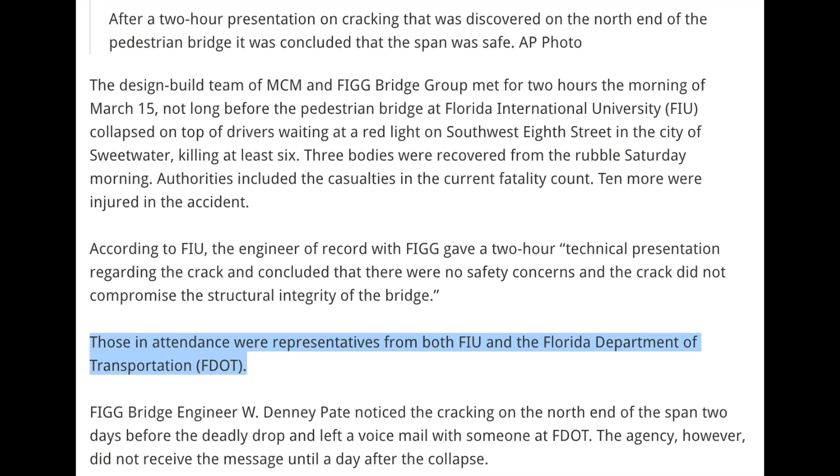Hey Tom, this is Denney Pate with FIGG Bridge Engineers. I was calling to share with you some information about the FIU pedestrian bridge and some cracking that's been observed on the north end of the span, the pylon end of that span we moved this weekend.

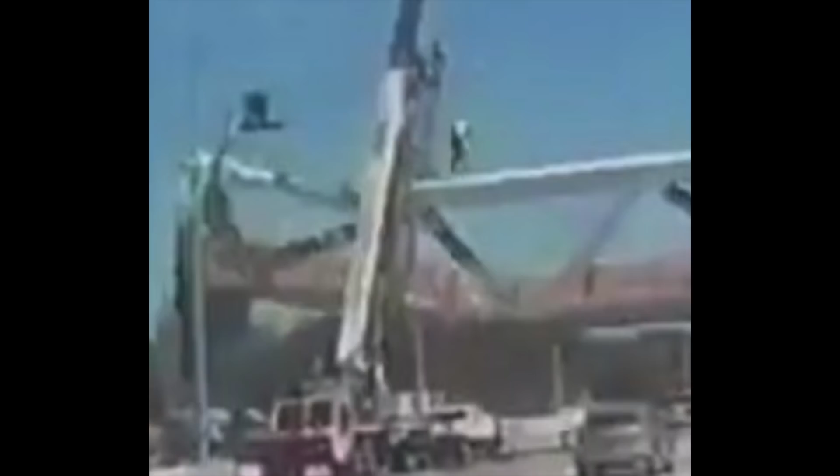So we've taken a look at it, and obviously some repairs or whatever will have to be done, but from a safety perspective, we don't see that there's any issue there, so we're not concerned about it from that perspective, although obviously the cracking is not good and something's going to have to be done to repair that. But at any rate, I wanted to chat with you about that because I would suspect at some point that's going to get to your desk. So any rate, call me back when you can. Thank you. Bye.

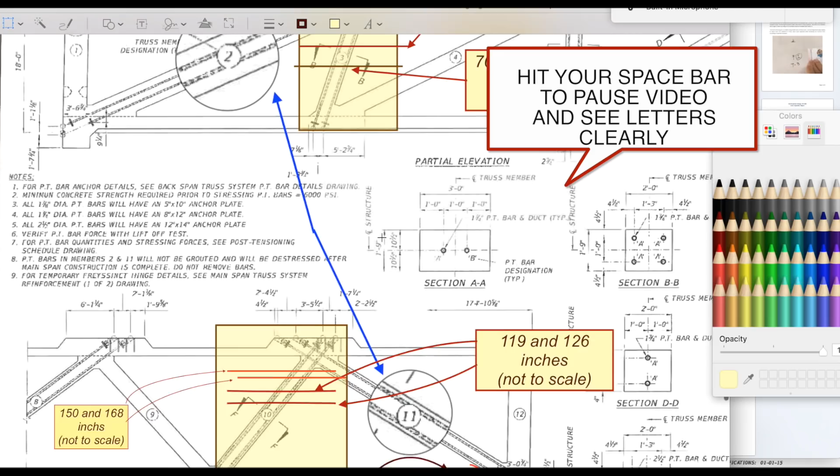It's going to be an update to a previous video I had where I show the cracks in the members. I put the cracks in those members in the wrong location. I put them over here, and I believe I put them in number 11. I should have had them in number 3 and number 10. Now let's go over that again so I can give you a correction and update.

As we see, this is the report that no longer exists publicly. It's been removed by FIU. And the report shows that post-tension bars number 2 and 11 stressed, okay. So let me just read off, sorry about that guys. A visual inspection of the main span truss members 2 and 11, so they were talking about 2 and 11, were stressed. Cracks were found at moments of the inspection. These have been identified per truss members and consecutive numbers within the member.

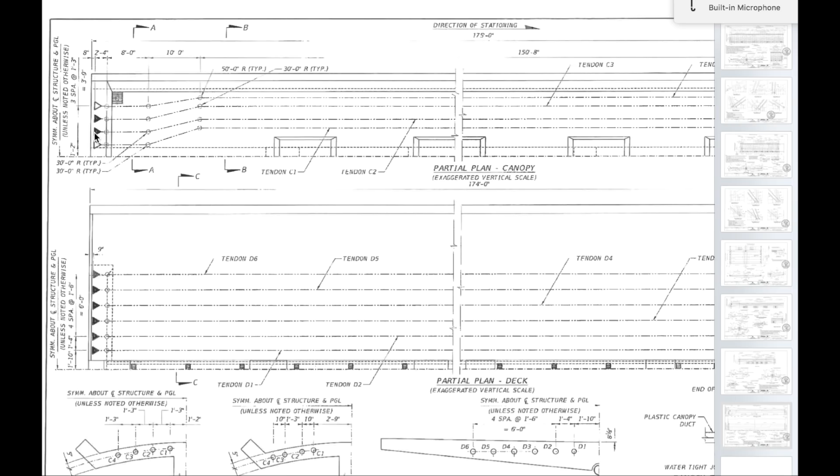But as you know, we saw the post-tension tubes; apparently C1 is now underneath the node, underneath the blister bar. That would make you also think that, heck, all of them are now straight, in line, and no longer have this profile. So C2 is pretty close. If we follow C2's path, I'm going to jump in part of this video again. This implies C2 is very structural because C2 is going to be the strong back for this bridge. C2 is the first one you see there. There's 2 of them. The other one is C3.

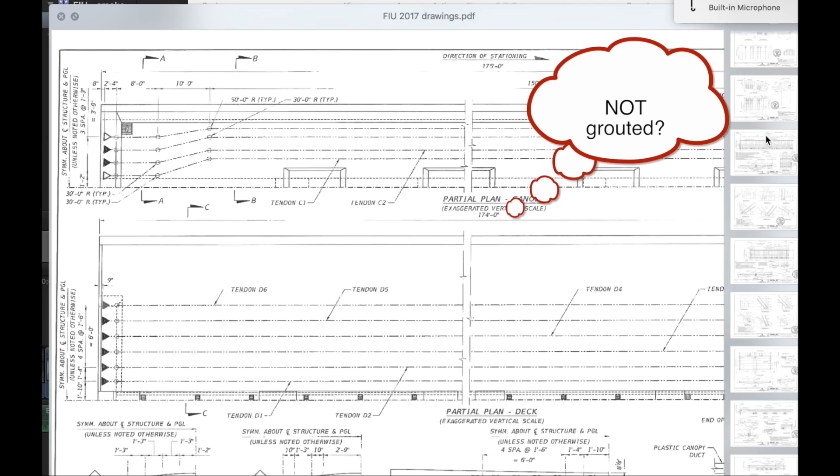So as you look at the profile, this is C2 and C3. But C2 is now straight across, is no longer offset as we saw in the drawings. I mean in the real world. Here's C2 right there. Here's C3. In real life, C2 again goes straight across. And here's the blister bar. Blister bar is coming out here roughly like this. We have 2 others, as I'll show you later in the video. You'll see 4-inch spacing of the conduit, and then you have the C2.

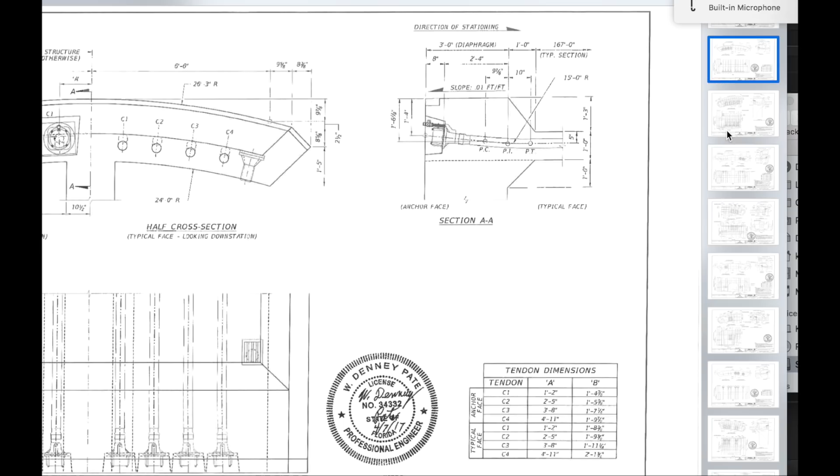So this makes a huge area of voids. It's just amazing. So we went over that in the other video. Then we move to number 2 and 11, which he's talking about now, which is stress post-tension bars in diagonal members 2 and 11. Okay, after you do these two, there's plenty more down this list. Now watch this, so realize that.

So he's out there at this point, because he says the members showing these small cracks are truss members that share the same blister at the canopy of the already stressed members number 2, which was done on January 30th, and number 11, which was done on January 29th, the day before. So we go back, 2 and 11, that does not count 10, that does not count 3. Now this is crack analysis, so we're trying to figure out how these cracks produce themselves. So we'll get to that.

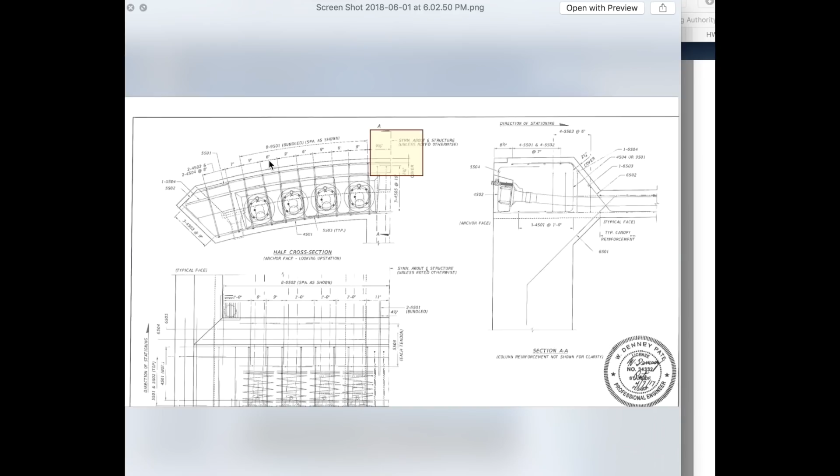I only have 7 images to go through. Okay, thus creating cross-sectional cracks, transferring tension loads to the steel on these members. So the report implies that tension created cracks, not compressive forces. If that's the case, why do we have longitudinal cracks, which he's clearly given us snapshots of, but this appears to be in line with the rebar that you saw in the NTSB's photographs. A video we show has the bar in line with the tear out the bottom of possibly this member here.

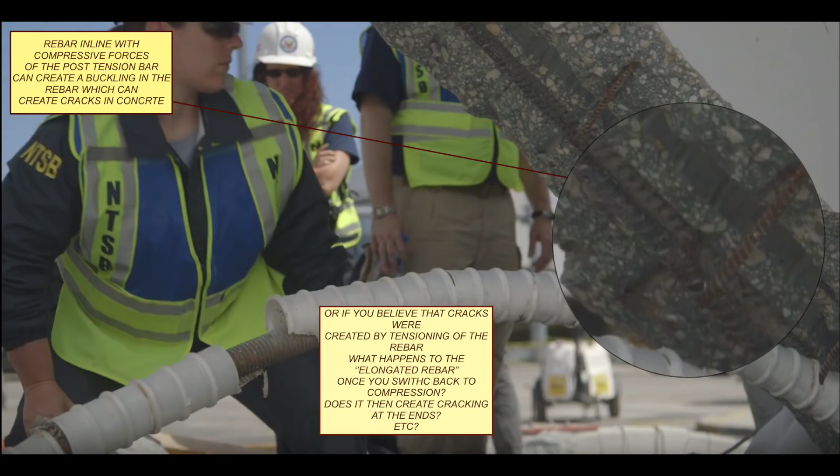It's kind of an odd thing. Now one more shot at this one for you: I speak further in the video about how the center span could be deflecting, getting you this action here. Also, we don't know how these joints are down here, how they did it. So we could have something as simple as that. We just don't know. We do have a coating over here that we have to give more respect to. This engineer, as I said in the previous video, says he's inspected this at the time of this incident. But clearly they applied a coating before his inspection.

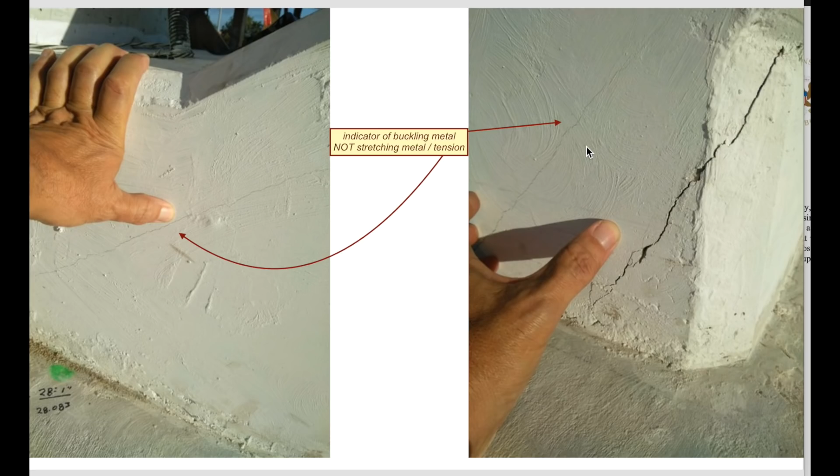I find it odd because if you watch the move video, they have tons of BPA people out there. So I find it odd that they show up 7 days later to do this inspection after this was post-tensioned. We believe this first stressing, this number 2 and 11 operation, has temporarily created tension in members number 3 and 10. So we go to 3 and 10. Here's number 10. Approximately 119 inches measured from the bottom of the member. Okay, and then number 10 again, 126 inches.

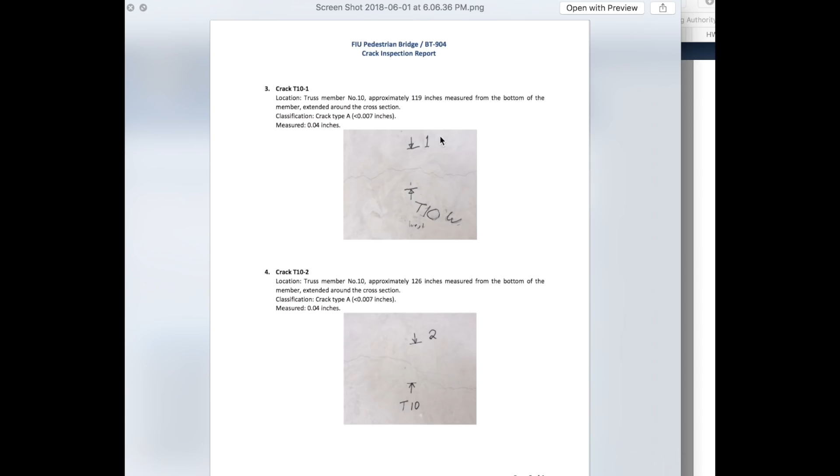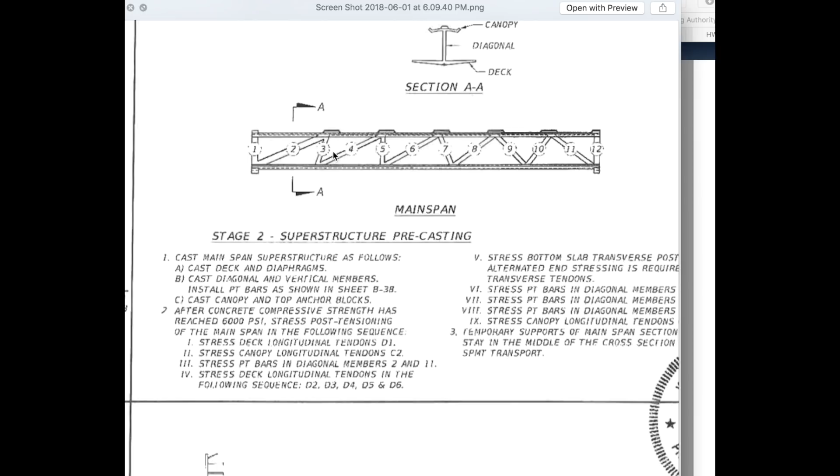So that's 10. And here's number 10 again. So 10 has multiple breaks in it, here, here, here, and here. 4 breaks that he's speaking of, and 2 here. I'm not saying there's not more. He's speaking of 4, and 2 on this one, after they did number 2 and 11. We believe this first stressing operation has temporarily created tension in members number 3 and 10, thus creating cross-sectional cracks, transferring the tension loads to the steel on these members. No other truss members within span 1 show any cracks similar to those shown on members 3 and 10.

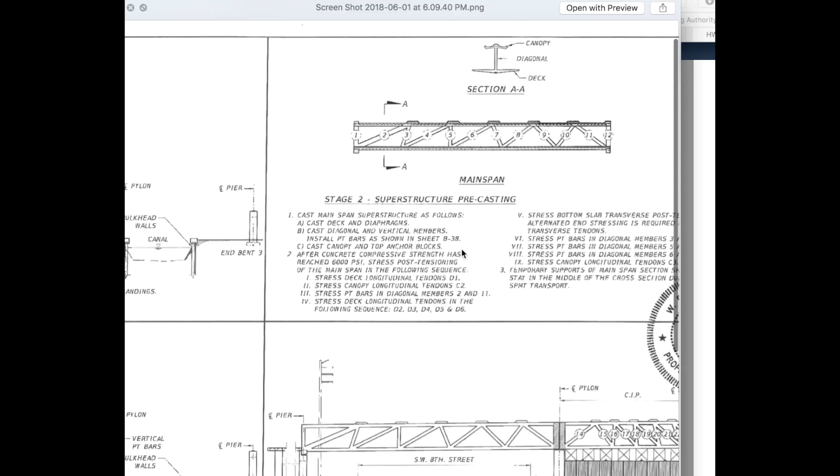So we're talking crack analysis again, remember? Bear with me, let me get to that image. I'm going about it differently. We're going to see if we can make these existing cracks happen, and we actually have a report that can talk to us about that. And from there we can figure out why Denney Pate and that whole group of people decided that they should post-tension again. So the engineer report says that they did 2 and 11. Multiple cracks showed up. Let's assume for a moment that they didn't continue down the process of post-tensioning the rest of these. The inspector was there after. He missed both appointments because he's not mentioning that he was there doing any of them.

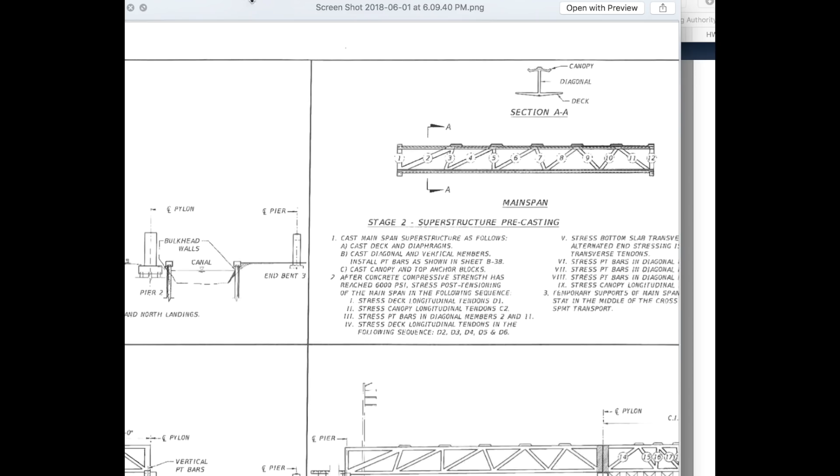So we're going back to the paperwork. That's when we created these cracks here, which tells you that post-tensioning 2 and 11 actually puts stress and loads down number 10 and number 3. A significant amount of loads. It doesn't release it, does it? Or did it put it under tension, as he said? So he's calling these tension cracks, that you're pulling so tight that you're creating a camber in this bridge, elongating number 10 and 3. Is that his word of tension?

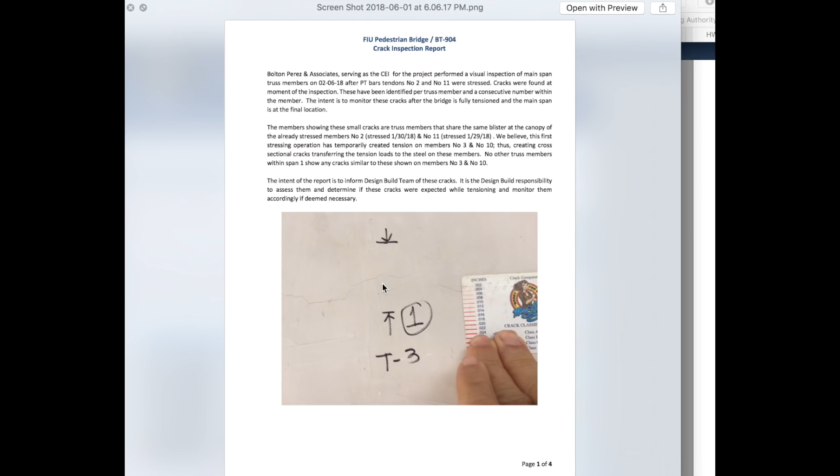Because he says here, we believe this first stressing operation has temporarily created tension in number 3 and 10. Now tension, again, refers to a typical truss member, tension pulling on it. As we know, this was going to be under tension anyway, right? At least that's what we think. No other truss members within span 1 show any cracks. The intent of the report is to inform the design build team of these cracks. It is the design build responsibility to assess them and determine if these cracks were expected while tensioning and monitoring them. So he's saying these are actually separation cracks, cracks that pull away. Here's where I have an issue with that. If it's pulling away, how do you get 4 cracks?

If it's already separated and caused a separation here, how does it still manage to cause a separation here under tension? If it's cracked, you can't bridge a crack with tension still. And I get he's calling it tension cracks because he doesn't see compressive forces inside. They're like crushing cracks, or like bursting little edges. So he's going with what he thinks it might be.

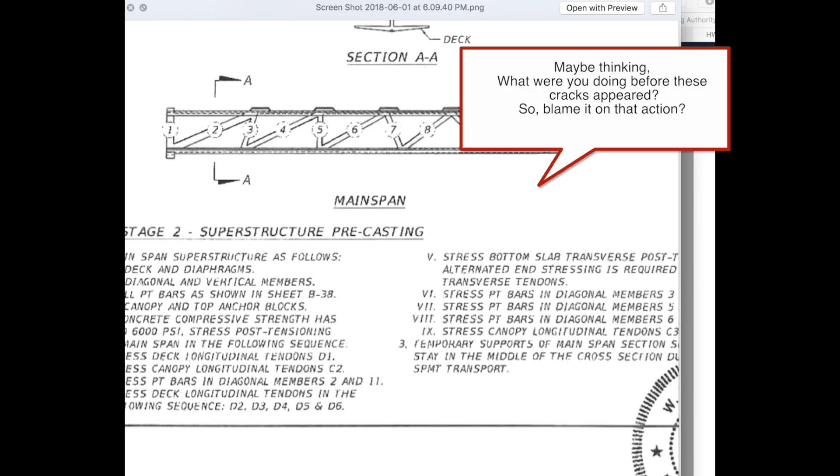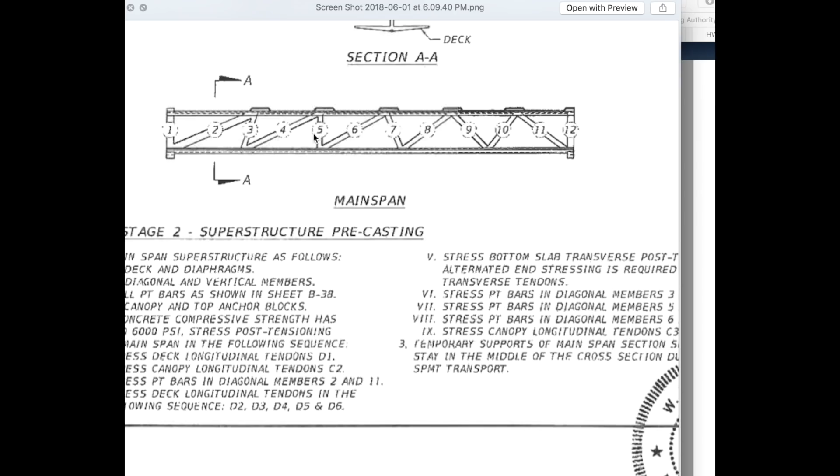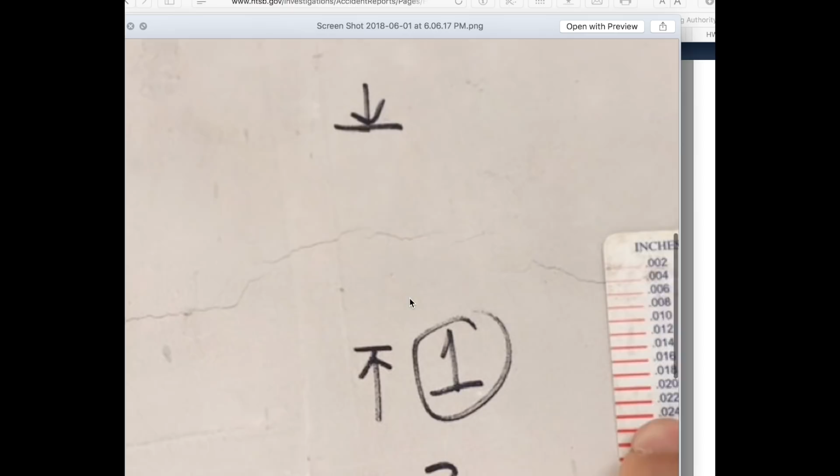And yet it was able to pull, in his theory, for the tension he's thinking of, pull 1, 2, 3, 4, and then pulling on this one 1, 2. Taking note of the shape, this one apparently causes more tension cracks in 10 than 3. Let's go back to this. So we're backing up. Come on, baby. All right. So if we can only see these cracks in more detail, we better go about it more. But he's implying going about it more.

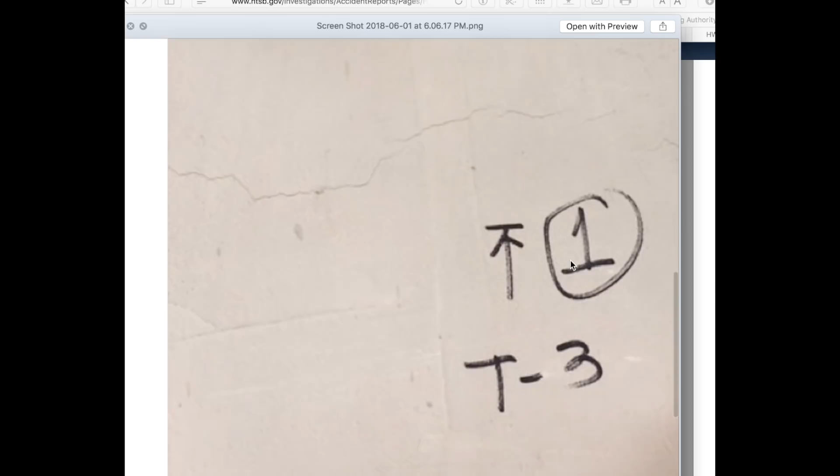He's implying that it's pulling away, tensioning this way and this way, not tension as in a member having tension on the underside of one side, and the tension crack shows in the bottom half of it. This is implying that tensioning numbers 2 and 11 created breaks and therefore forces in number 3 and 10. We scroll down now. Oops. And here we are on number 3 now.

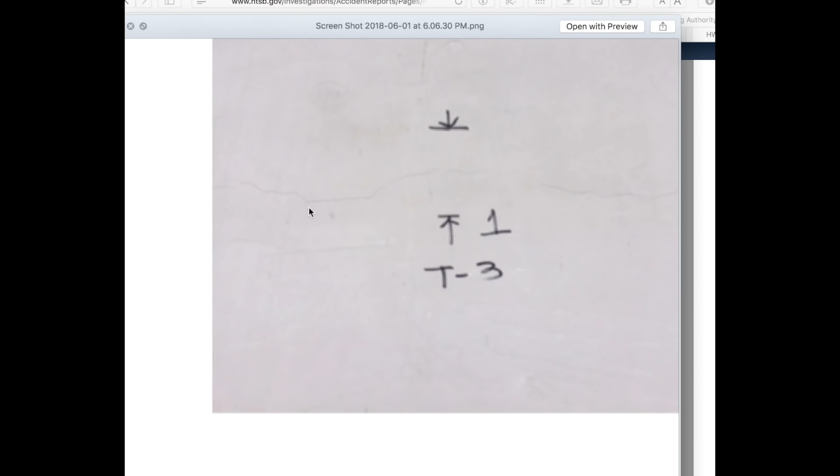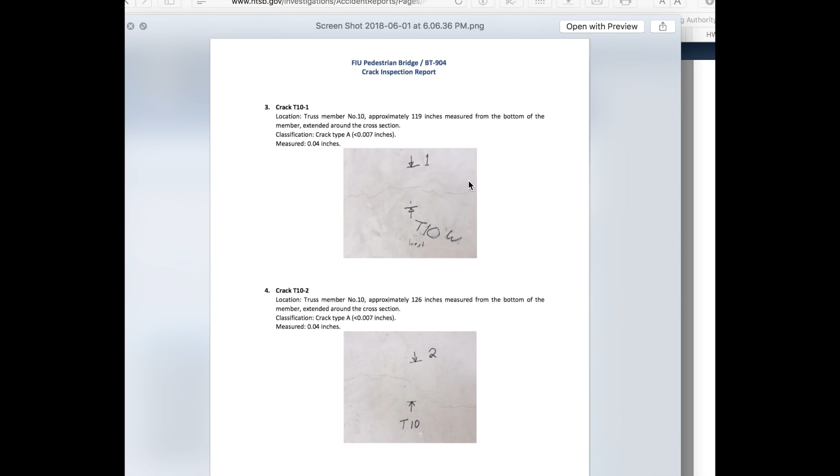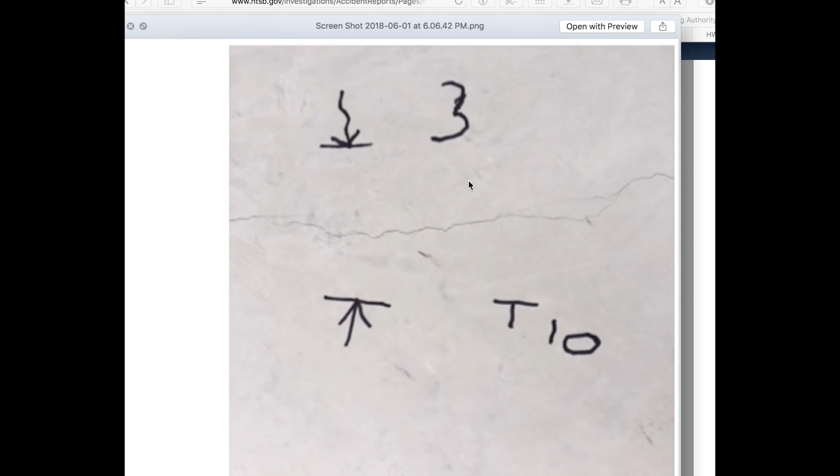And here are the cracks again. So he says none other was observed, as he says further down. Well, there shouldn't be any other observed because he shouldn't be over there yet. All right, so you can see how these things just pop out in number 10. The depth of them. But he didn't want to use his crack monitor on that one. No, that would be not right, would it? All right, so we're gonna take note of that. Putting tension on 2 and 11 created tension in 10, creating cracks.

Okay, so we go down here. They continue on. They said to monitor. Next, they're going to do post-tension bars and diagonals number 2 and 11, right? Stress deck. So this is not 3 yet. When we come to 3, moving on, stress post-tension bars and diagonals 3 and 10. So this apparently would close those cracks back up, you would think, right?

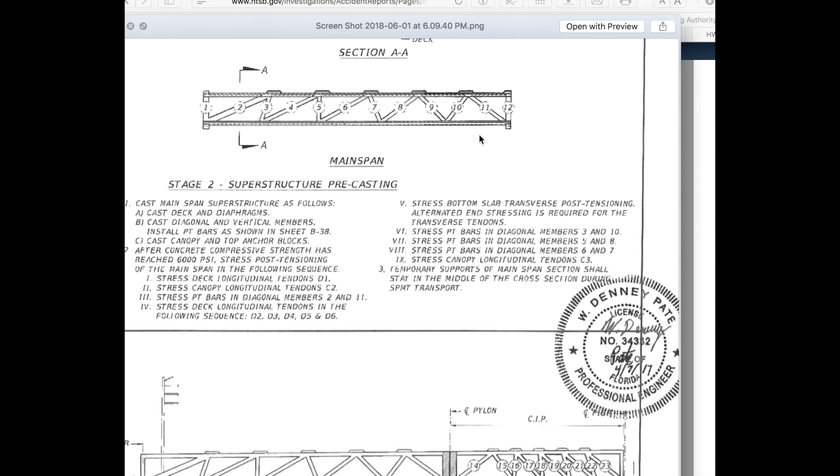We all know that if you close them up using 3 and 10 to close these cracks up, that would have a counterforce against 2 and 11. Which would mean you probably would have a problem because you probably put it up to the kips they were supposed to. So then it probably would pull this back down again, pulling the deck back down again. So maybe they went back at it again, as we've theorized, to get it back level again. So you go back at 2 and 11 again.

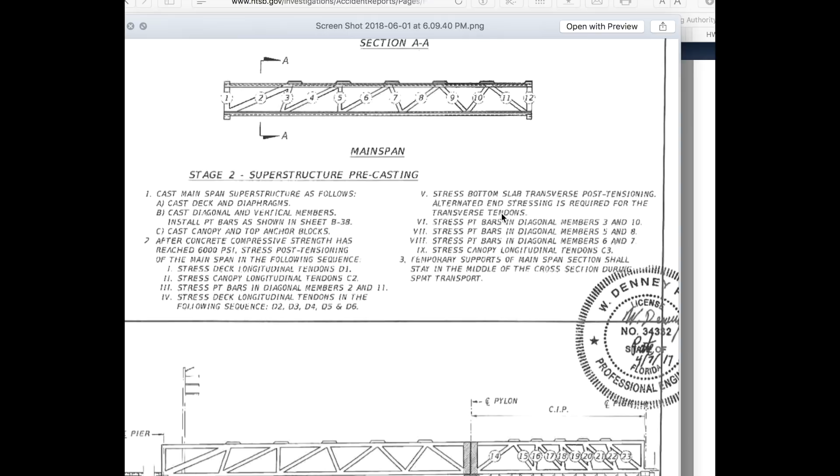We just really need to know how many times they went at adding post-tension, how much of it was just a mystery to them and just guesswork. Okay, VSL could report that for sure, I'm thinking. Denney Pate should be able to report it. And surely FIU and BPA. BPA is only going to be able to put what they see, but they apparently had people on there continuously. Let's go from here now.

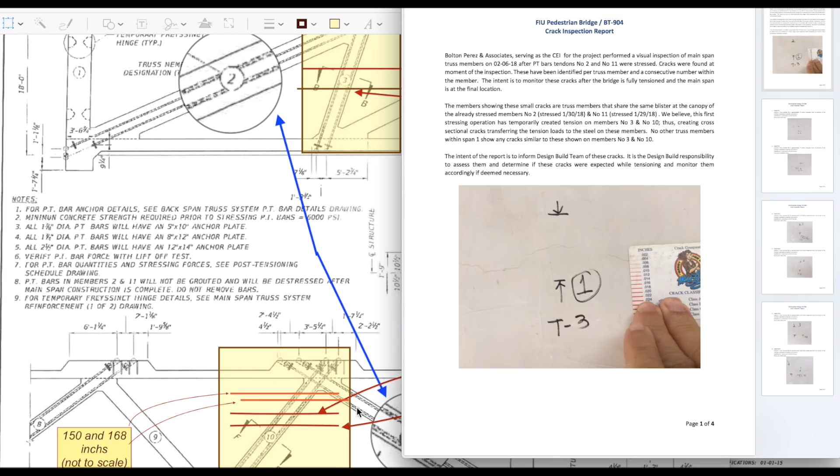Next paragraph. The members showing these small cracks are truss members that share the same blister at the canopy of the already stressed members 2, stressed on January 30th, and the day before, stressed on January 29th, number 11. This is number 11. Sorry, guys, I got to move this over a little bit so you can see a little better. We believe, that's BPA, who are the inspecting engineers, all of a sudden now making a conclusive statement. We believe this first stressing operation has temporarily created tension on members number 3 and number 10. So they believe stressing this one and this one created a stress on number 3 and number 10.

Let's go over that again so we can get this 100% clear. We believe that the first stressing operation, which is up here, has temporarily created tension on members 3 and 10, thus creating cross-section cracks. I believe this is what he means by cross-section. Cracks similar to those shown in members 3 and 10. Okay. Transferring the tension loads to the steel on these members. No other truss members within span 1 show any cracks similar to those shown on members 3 and 10. Well, we already talked about that. Similar means it had to be exact? I can say similar. I can find what you and I would think are similar.

This crack and these are similar. But I can identify this as nothing else similar compared to this one. It's your evaluation. Okay. So now my evaluation says if I don't see this pattern, then nothing similar to it. That's my out on that. That I'm thinking is an out.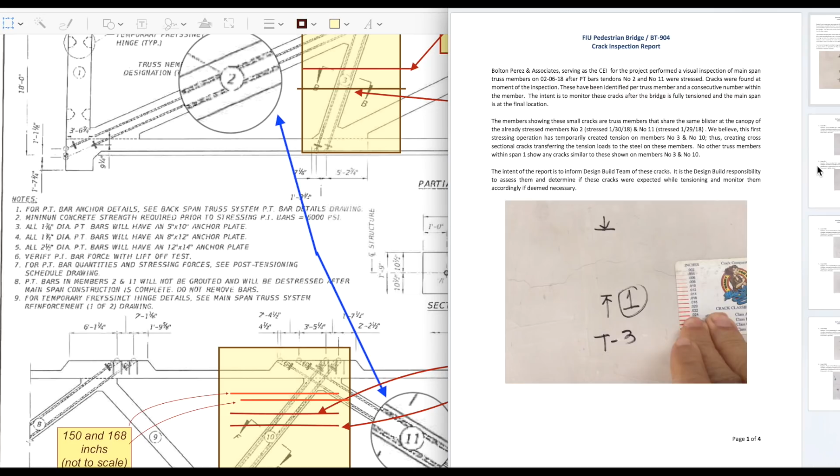Moving on. So now we're going to get the location of those. We go to the next one. We show truss members 3. This is 3. And referring to them as truss members, not a diagonal. Approximately 70 inches measured from the bottom of the member, extending across the cross section.

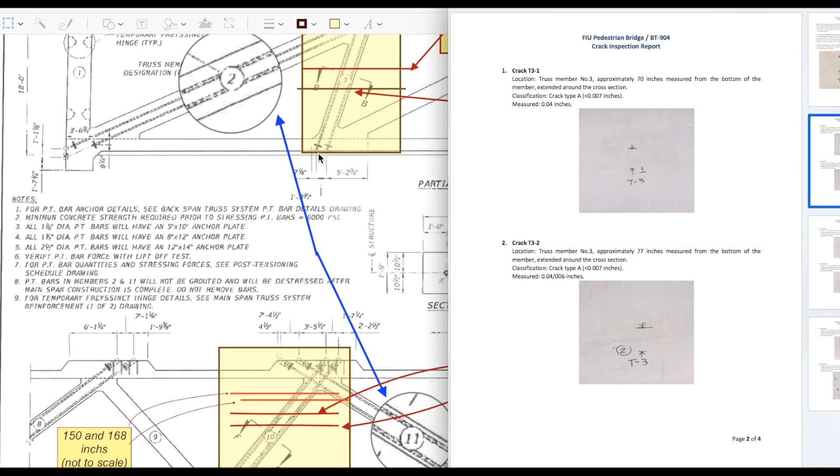So I don't know if this is the truss member right here, but the bottom of the member here is the bottom member here. You know, where's the bottom of this member? Where it changes direction, so we'll put it there. Or is this still the member because it's got the post-tensioning in it? So it's a measurement from here. So these measurements are variable. So here's 70 inches and 77 respectively, and they're not to scale. So you've got cracks going across. And let's go on from there.

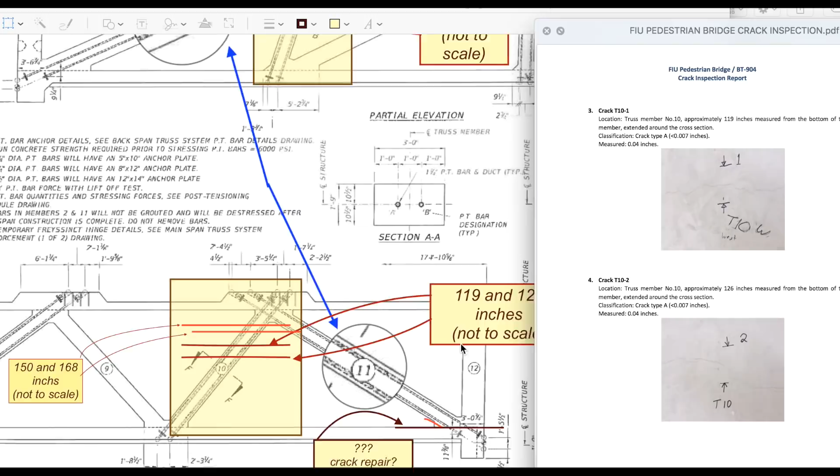So then we move on to the next statement, which he's referring to as T10-1 and T10-2. So the truss location, truss member 10. So we're in this member, 10. Approximately 119 inches measured from the bottom of the member extending across the cross section. Okay. Maybe I made up the deck part, right? So we got 119, and we're going to have another one at 126, and he's going to mention another one, 150 and 168. So this one's taken on a significant amount.

We don't know when they appeared. Did they appear when they compressed this one, when they removed the forms or not? But his statement is ambiguous, and there's a sizing of it, and of course we know that the inches are different sizing. That was an issue I said in the other one. And same thing here. He's mentioning these inches, and then he changes it to here. Correct. This is less than this. Can't be less than that.

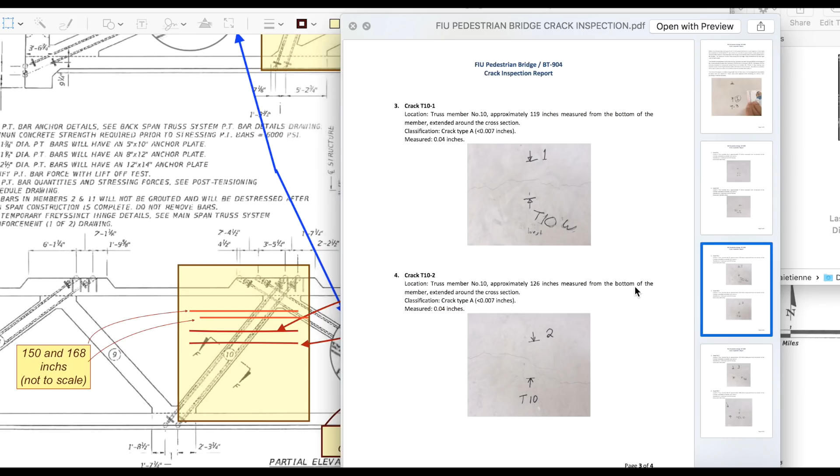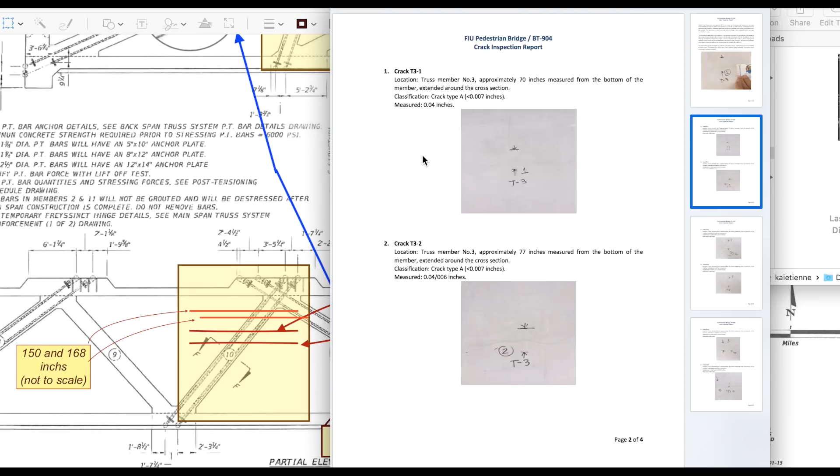Okay. Location number 10. We're here again. Approximately 126 inches measured from the bottom of the member. So we've got 119 and 126. And there we go, 119 and 126. And we got the 150 and 168 as identified in the next shot. Location members number 10. My previous video, I put them over here when I put them on number 2 and 11. And that was my confusion, I believe.

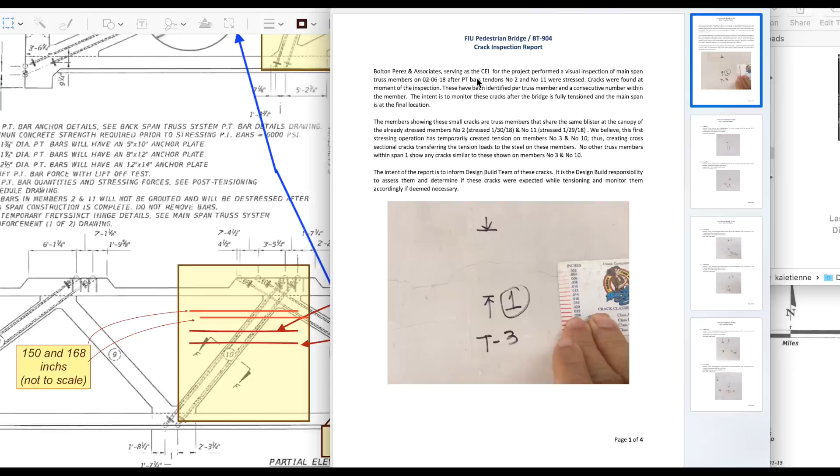And here we go. Bolton Perez, my responsibility, red. I actually had somebody else do the graph for me real quick. Bolton Perez. Let's move on from there. Let's talk about this crack that NTSB wants us to focus on. And that's the crack there, right? They want us to drive down to that one to take real responsibility on that, to own it.

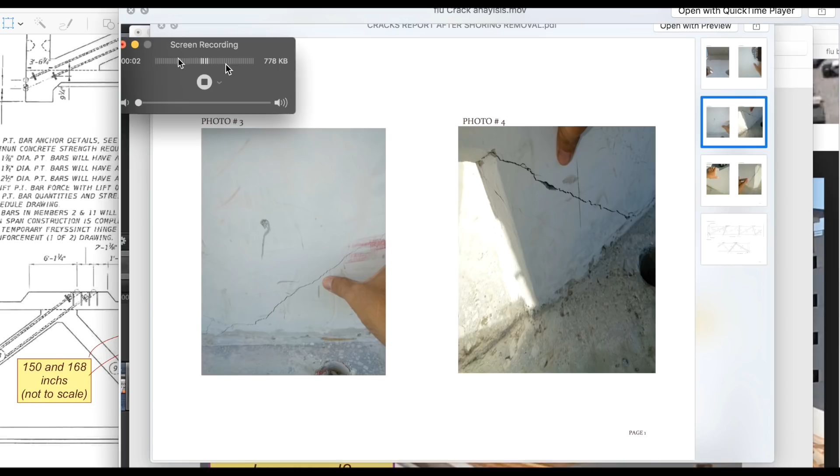While I'm here, let's go ahead and look at photo 3 and 4. Look at the craftsmanship. And we didn't address this craftsmanship. Look at this. You know, what do they do? This is just ridiculous. I have no idea, this form work. Look at the raggedy edges and the raggedy edges here and all these cracks, etc.

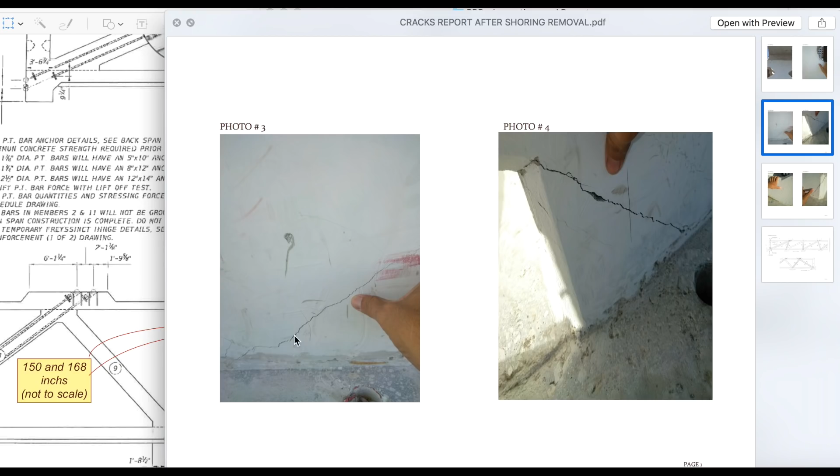Now, NTSB is now pointing us over to this direction. Take note of the pipe that's on the ground here and here. And they want us to believe that this crack is of issue. And we see we got some more spider cracks, meaning they just go off, they tie off, is how I like to refer to spider cracks. From there to there.

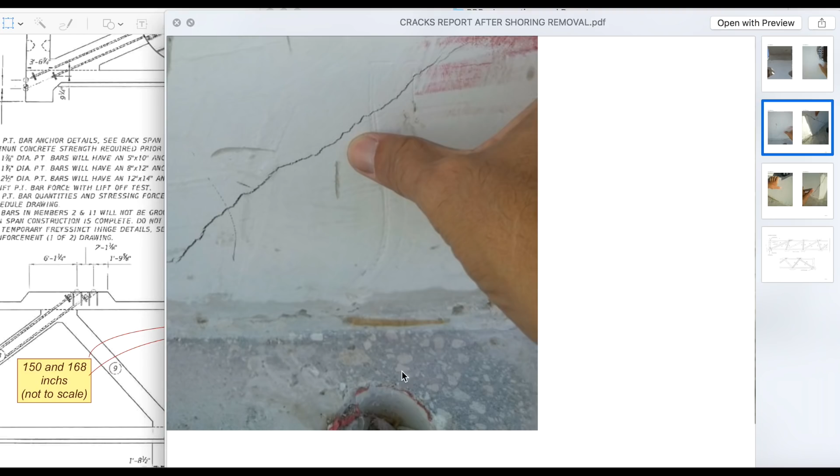Now, I will say this, I grind concrete also. This looks like concrete's been ground right there. So, you know, why are you grinding concrete there? I mean, that's ground concrete. You're not getting that finish. When you grind concrete, if all the paste is being pulled off, you come down to the, yeah, that's what it looks like when you're grinding concrete. This is not ground concrete.

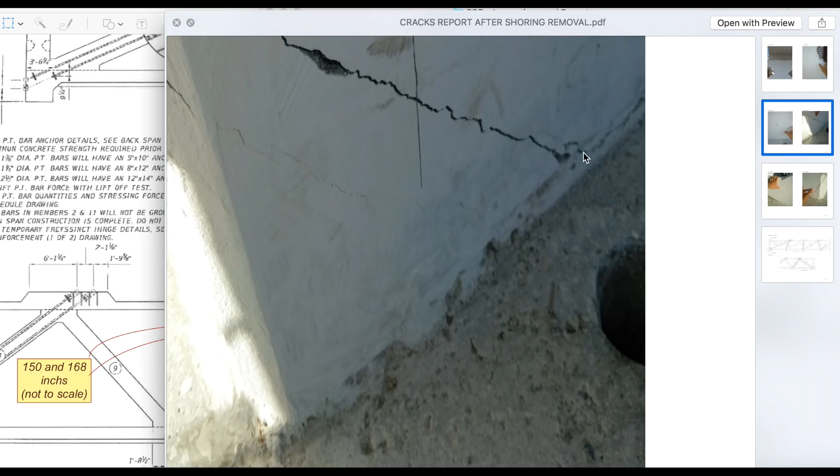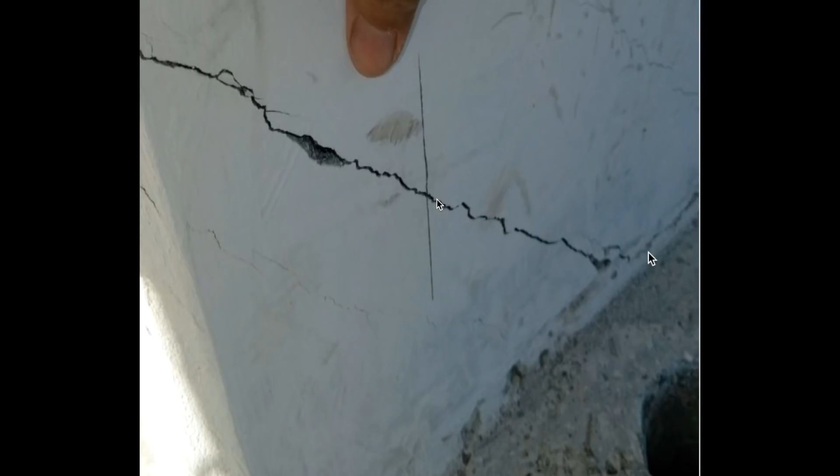But this crack here, this is the crack that they keep showing us, but they're not focusing over here. By default, this is movement away from each other, right? So you got tension somehow, created through center span bowing or whatever. But if you got the center span bowing and you had the top canopy bowing at the same time, this would be a compressive failure, sort of like you would see there, but this is open. So this means it's like a tension failure.

The conflict I'm having is the only way to get tension on here apparently would probably be to pull, this is number 11, you'd have to pull down on 10 to change the node's balance, pulling 11 up, if you will. Believe me, it's kind of odd, right? But 10 has no post-tensioning on it at this point. It's got dead weight. The only real acting force at this time is that number 2, C2, has been post-tensioned.

Could the top of the canopy have been made taut and actually flexed upwards and pulled number 11 to create this action? Because remember, this is supposed to have happened after they post-tensioned, which means made compression in number 11. So if they make compression in number 11, how do we get a gap down there? Yeah, we still have to justify movement somehow.

Conflict to that, because I've got to have a conflict to that, is if this is tension, how come this is not crushing on the upward movement? How come these are not doing that? And the other picture too, the alignment is wrong on the other one. But I can't discard that this is separate. This appears to be the pipe near the end of the 12 and 11 connection, and that's pretty much all compressive area over there. So how do we get that gap? We've got to pull some tension. We've got to be able to pull this thing back.

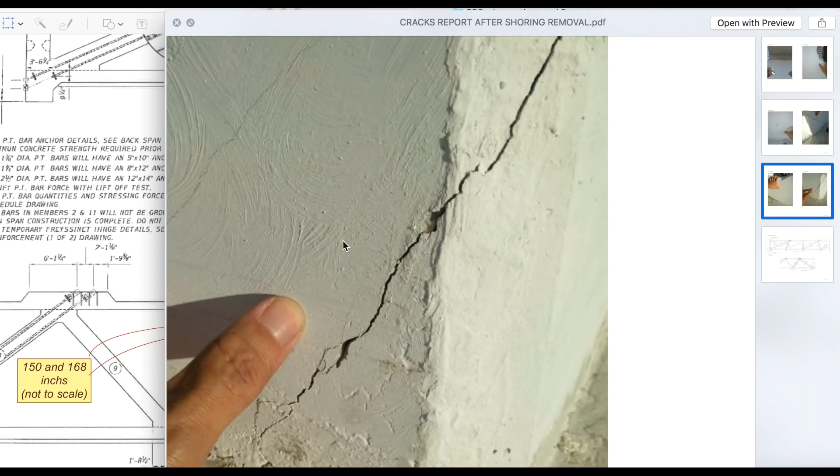Here. Because the inspecting engineer, as I said, is giving soft reports, conflict of interest, in my opinion, negligently, we don't have more photographs. Remember, we're missing photo 7 also. But now we've got this one coming across here. Now I'm going to tie this in for you. We've got a movement away from this structure, away and down, if you will. So here's the tightness here. Here's the opening here. So this implies that to pull that down, you have to have a sag towards the center of the span, sagging downward, which would create this action here.

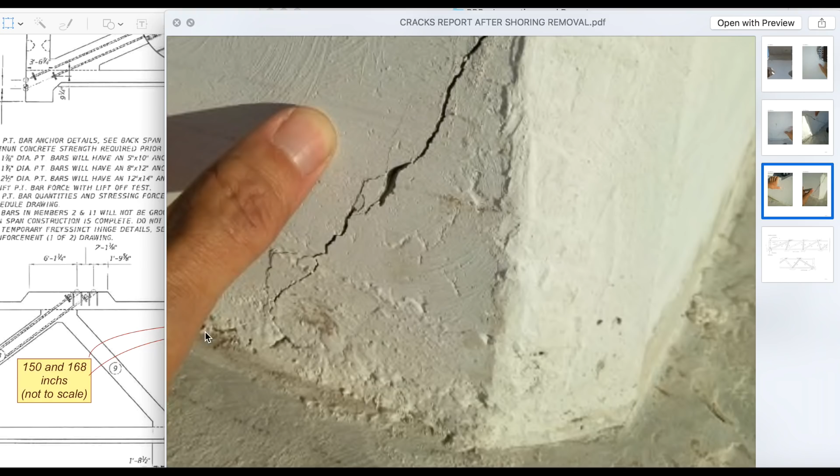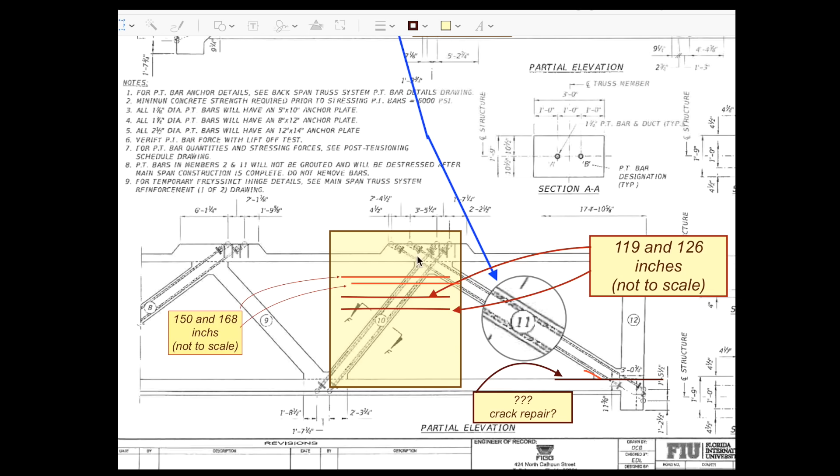Now his hand's there, which we don't need at this point. Clearly it's a photograph. I'd like to see this crack, which we're seeing here, more of it as it migrates across this direction. My thinking is that they were doing the repairs on this deck, this VSL company, as per Denney Pate's demand and FIU and everybody else in the meeting. With that said, if you were to try to close this crack up, this is the one that NTSB is making us look at, smoke and mirrors, the silliness over here. This crack here, limitedly so. I don't even think they...

Here you guys go. Apparently, number 11, when they detensioned it, cracks showed up. But we don't know where these cracks showed up. If they showed up at the base where the arrow's pointing now, and I'm doing a voiceover here, the problem I have is that column is supposed to be under compression. How do cracks show up when it's got compression on it? It's already closing it down. The only other way is if you detension number 11 and cracks showed up, they would have to be at the underside of number 11, and you'd panic and want to close those up. But detensioning number 11 on its own, since it's under compression, you would get buckling, etc. But you wouldn't get cracks opening up.

Now the slide at the bottom there, could that slide? Well, we know number 12 is stationary per the evidence that's left behind. So let's go back to the original problem of number 10 opening up. So they detension number 11, and all of a sudden these cracks show up, or they show up larger. Remember, there were cracks in it before, and we don't know if they fixed them or not, but that doesn't matter at this point

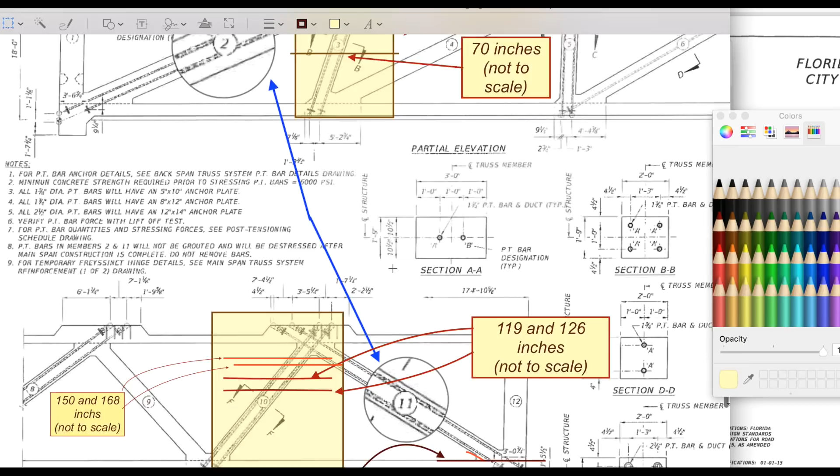Number 11 did not play along, as we can see that it already had a significant amount of damage to it. So 11 along with 10 didn't want to play along with these reversing forces, if you will. That's my guess on that. So when they started post-tensioning again, they just kept forcing it, trying to make it happen. And maybe the post-tension bar did break at that point.

But nevertheless, the bottom of 11 has open cracks, which again are not compressive cracks. Those are tension cracks. So it appears that number 10 might have switched off and decided it was more compressive than number 11, based on the ability to change its forces on these nodes by adding extra compressive forces, which would be done with tensioning with the post-tension bars.

Man, this thing was just a wild playground. It was a wild playground.

But again, if you see openings at the bottom of 11 in the photographs, remember we are looking back in February. We're not looking at the images of the incident that happened the day it collapsed. So we don't know what the cracks look like. So with that said, I am making my statements on the craziness of this design based in February and trying to predict the collapse in March that we have not a single image of besides a video. The images I'm showing you right now on the screen mean nothing unless NTSB shows the image and goes, oh yeah, this is the crack.

But no, cracks don't get smaller, they get bigger. So if they decide to close this bridge back up, those cracks got larger. If they decided to retension real quickly, or should I say in a panic if you ask me, you make all your evaluation in 2 hours. Look, I've been playing with this with you guys for 3 months, and I've only got this little bit of data. But they had all the data, and they made a snap decision within 2 hours, and they've got BPA telling them what they think the reverse forces are, and possibly rebar, and it's just craziness.

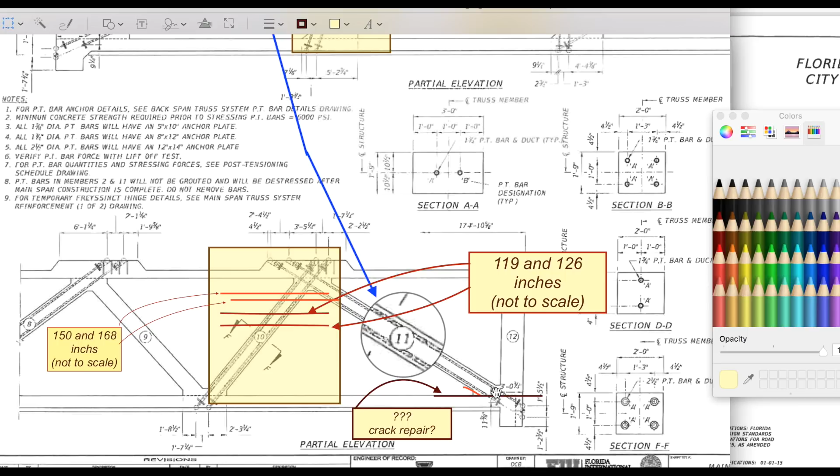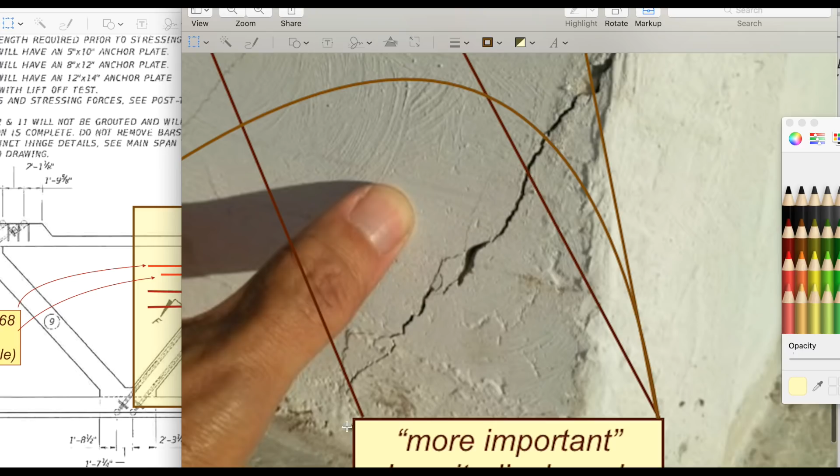Bottom of the deck. Well, it would clearly close up this crack, but wow, how much movement was down there? It didn't look like much. The indicating movement was at the top of this one, which, let me grab the image again, was at the top here. This is more open, and this is closed at the bottom. So if you had a sag in the middle of the deck, that does it. So this is the original NTSB photograph that they released.

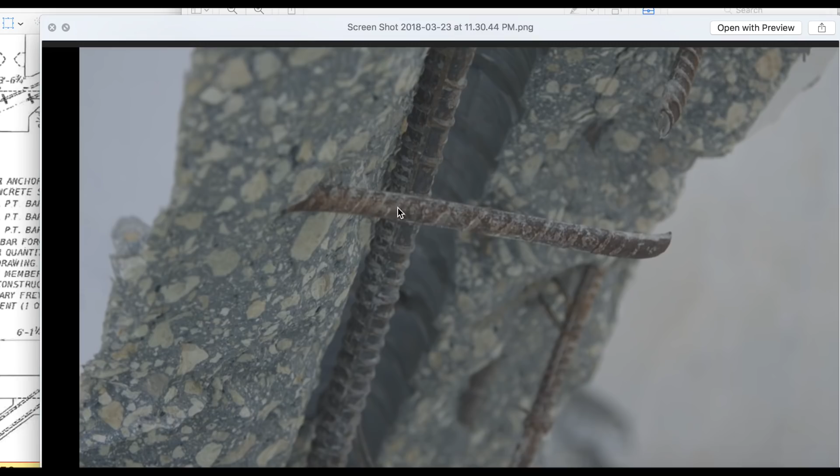And so I believe that post-tensioning, this is the crack you see mimicking on the outside, when they post-tensioned this, it created a buckling effect in this rod here, which bowed out and cracked it. Now it's also bowing, it might have come in contact. This is number 10, and I'll explore that a little bit. The number 3 and number 10 cracks, what is bowing out might have put these under tension, which is what he might be referring to on the backside, and forced them to exhibit their cracks in the columns at odd locations, not just everywhere. So it's showing you where the forces are.

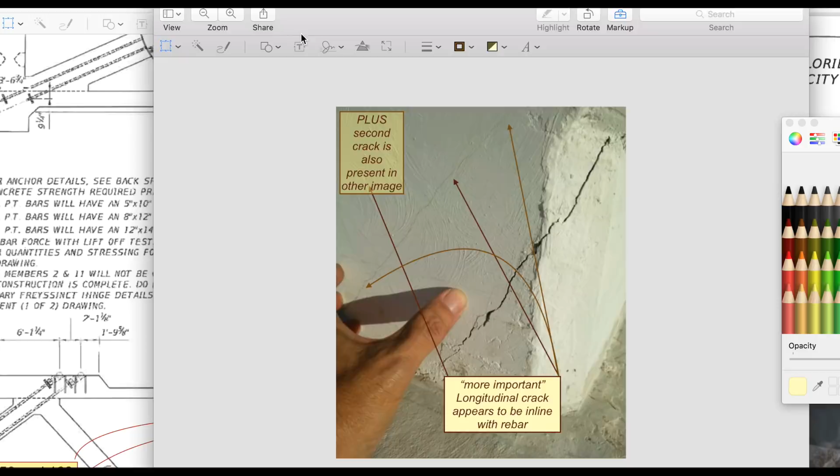So I think that's in line with the post-tensioning, the reinforcement, the rebar. So the cracks, as these exhibit themselves, are actually showing you where the load forces are on the literal structure. So if you're post-tensioning these, what he alluded to is that the post-tensioning of 2 and 11 created these cracks. Notice what the report says, that post-tensioning these caused these to exhibit.

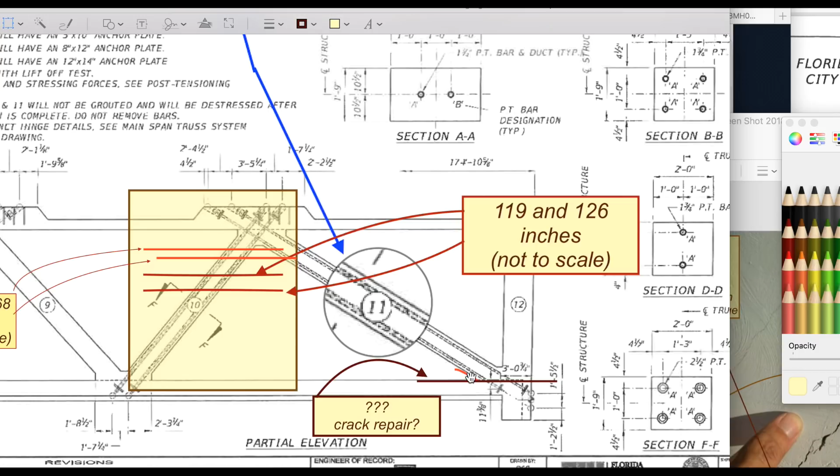And we got detensioning. Cracks apparently showed up again. And we know that because of Denney Pate's comment and the 2-hour meeting. And then they went back up there to do work. At that point, VSL is now addressing the crack as far as I'm concerned. And I think we're just being sent down a silly smoke and mirrors path. Now, how much bending do you need to create a little bit of a crack up here that we saw? I'm sure there are other photographs they're not releasing. We should be looking at the crack on the day of the accident, the 2-hour meeting. But NTSB is withholding that information from us.

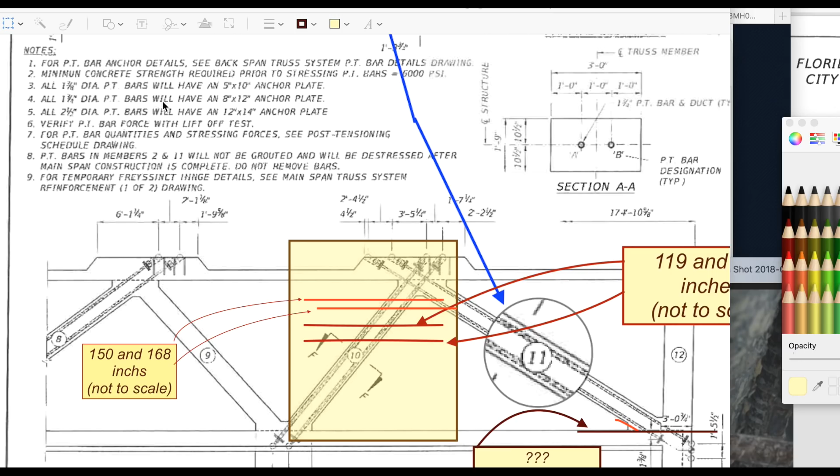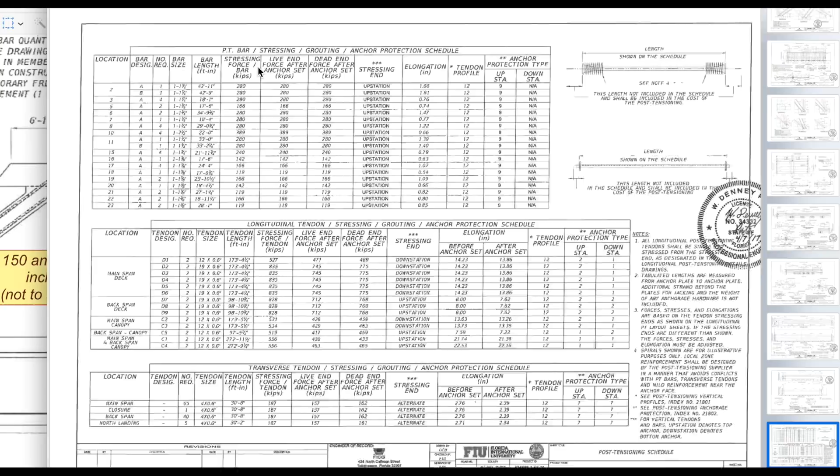Now, let me jump to one thing here. These are 1 3/4 inch rods, right? As we recall, you guys can take the pic. All 1 3/4 inch diameter post-tension bars will have an 8x12 anchor plate. These are the 1 3/4 inch rods, as we know per the plans. Okay, for post-tension bars, stressing and grouting. Number 2, let's go to number 11. That's the one we have the clamps on.

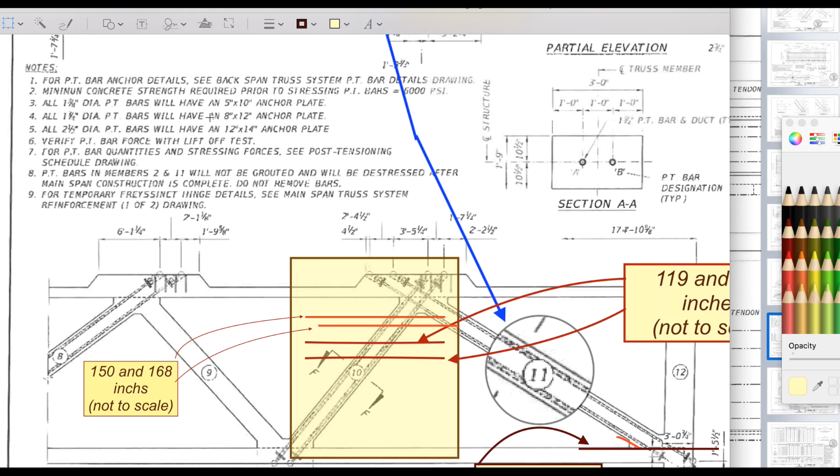Bar size, 1 3/4 inch, right here. So we have the 1 3/4 inch diameter bars right here. Look at my mouse here, please. All 1 3/4 inch diameter post-tension bars will have an 8x12 anchor plate. That means here, here, here, and here. That's a huge plate. Let me scale that roughly. I'll do a terrible scaling for you. Let's slide over. This is GG, this right here.

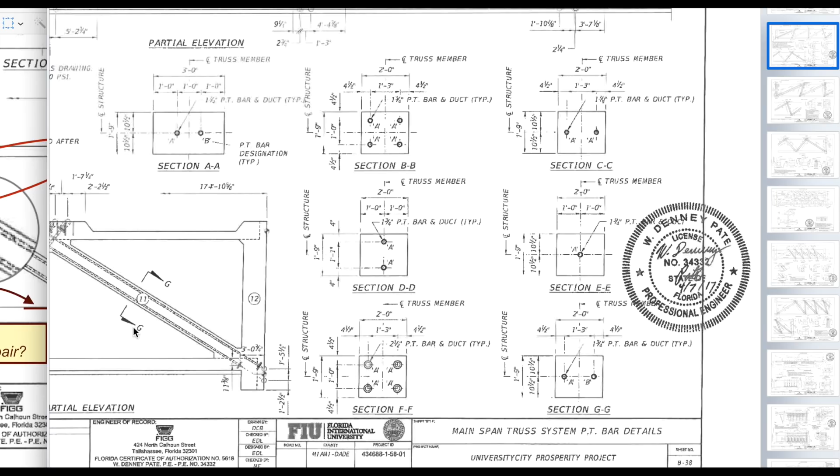Pulling over to the drawings to show you guys, it's GG. And it shows, let me enlarge, that it will be 2 feet by 1 foot 9 inches in shape. This will be 10.5 inches, 10.5 inches. So these will be center line, these post-tension bars. The scale will be such that it will be 4.5 inches from the outside edge to center line, and this to center line.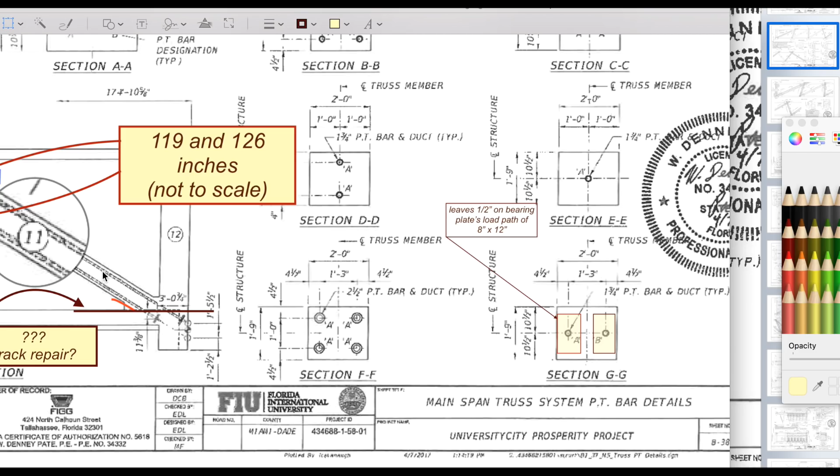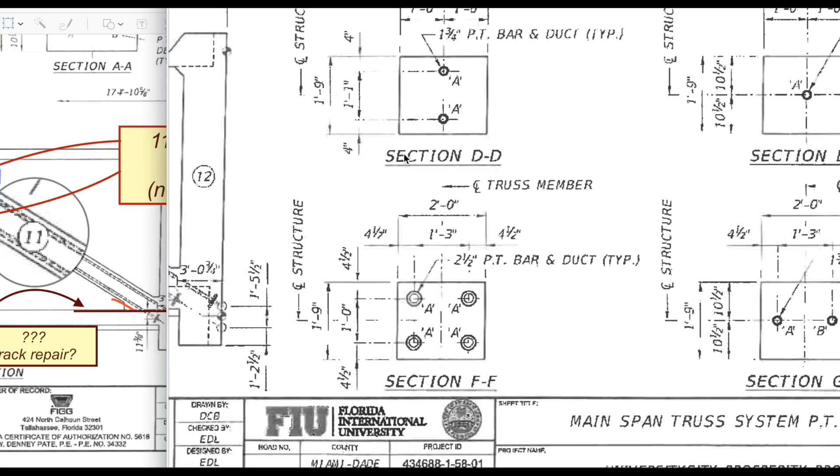So as we look at this, that's the 4.5 inches. As we come over here, that's the 4.5 inches. So we're looking at the wider part, the 2-foot part here. Let's slide this over a little bit. So this is 2 foot from here to here, and the underside is 1 foot 9. Now then we have plates that go on this that are going to be 8x12 plates.

All 1 3/4 inch diameter post-tension bars will have 8x12 anchor plates, because these are 1 3/4 inch bars. We slide over here. I did a rough scale, 12 inches, right? So that gives me 9 inches left. This is only 1 foot 9. Now, if we turn them the other way, the plates would be sticking out the outside end. So they had to have it configured in this manner.

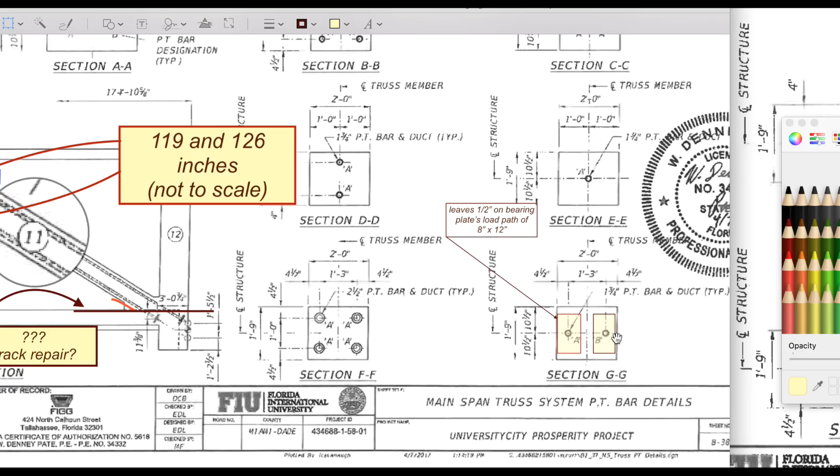So that's the manner as you imagine it going up to the top of the node. You can't turn it the other way. They just don't work. That'd be 24 inches, and we'd be seeing plates on the outside. We're now going to carry on to, let me show you where.

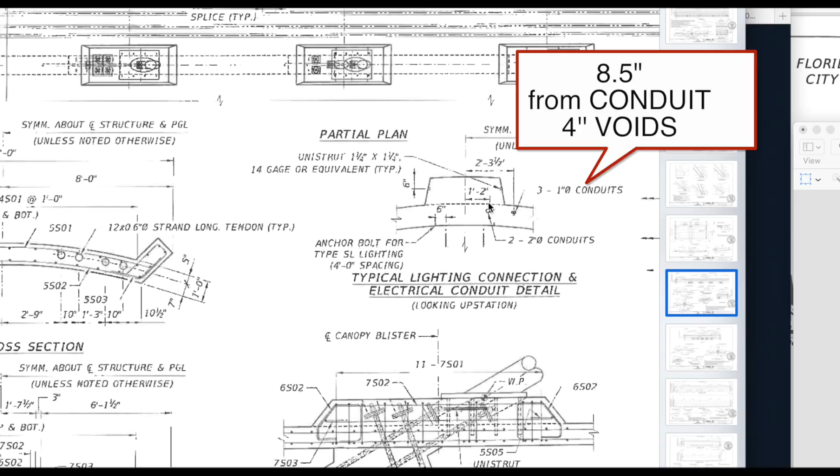So now we look at the blister bars. If this is the width of it, that's 1 foot 9. Center line off the width, we talked about this, so they're going 1 foot 2 inch off. So we're 8 inches away from two 2-inch conduits. So this is center line. This is halves, as I always made a mistake in my previous video, confusing you guys.

So center half is 9.5 inches from the center of that column to where you start having an opening, this void. So the post-tensioning rods will come diagonal down this column right here. This is a half. It would have been within striking range of the outside of this void, 4 inches before you made it over to a void. Well, that's the outside detail, but right here might be the duct. So let's call it 3 inches.

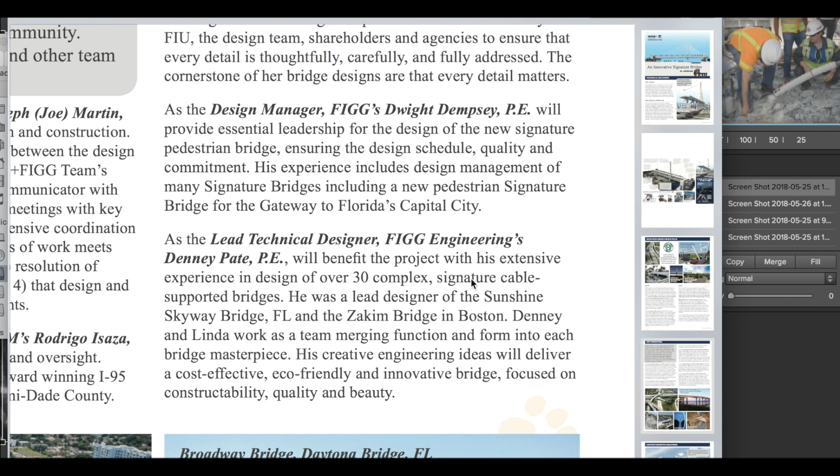And then we got Denny Pate. "As a lead technical designer, FIGG Engineering's Denny Pate, PE, will benefit the project with his extensive experience in design of over 30 complex signature cable-supported bridges." Yeah, well, this one was too much for him then. This is not a cable-supported bridge, is it? Therein lies the problem. You're bragging about 30 complex signature cable-stay bridges? Well, this wasn't one.

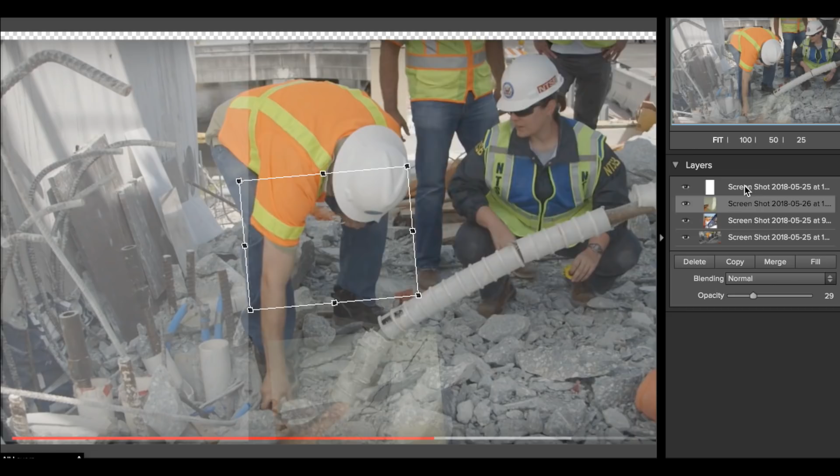You would see if I added that layer. That's the crack right about there. You see it's in line with the post-tensioning reinforcement. So I don't have an issue with it, as I told you. You got it way too scaled up. Oops. Yes. So we got number 12. Number 11, we got a crack.

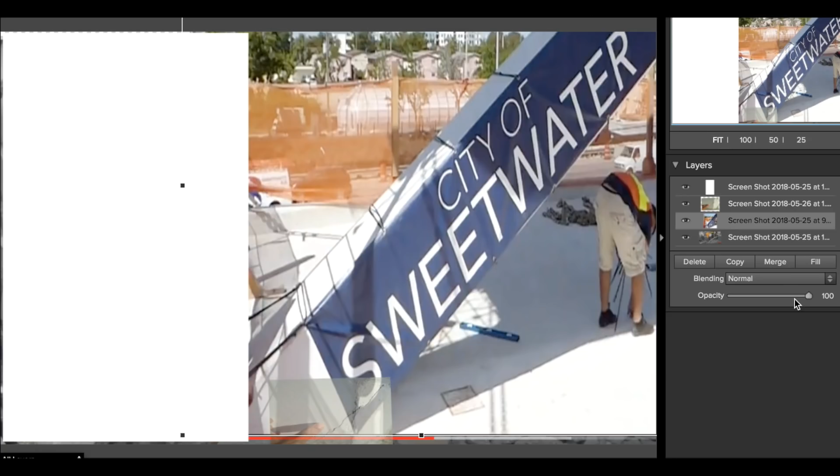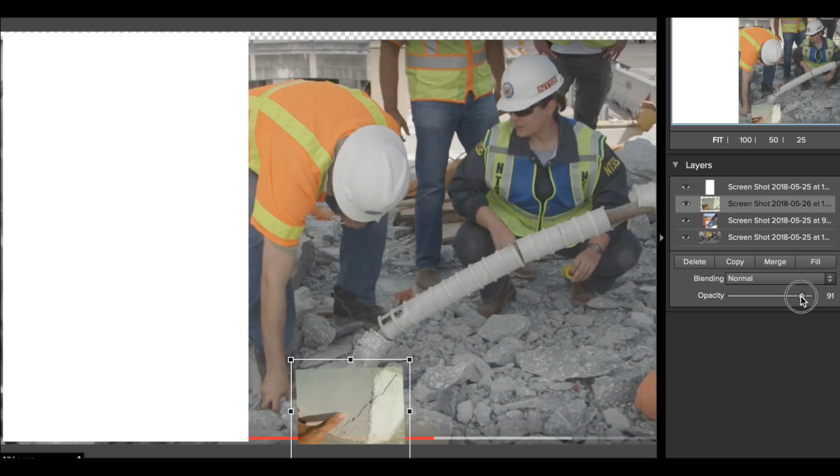So when I do that, and I come here to this little guy here, I lighten that guy up. You now can see where the crack is on the bottom of the deck. It's about 8 inches, and I think it's on the outside of the column. So this helps you guys visualize it. I visualize it like this for you guys when I see it.

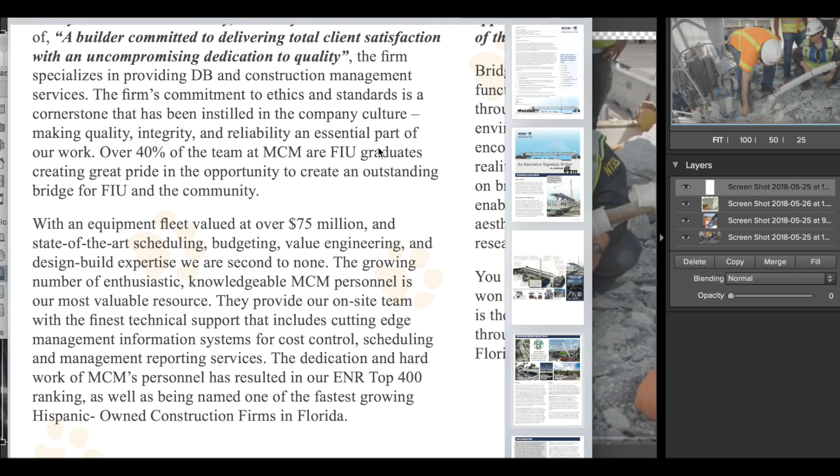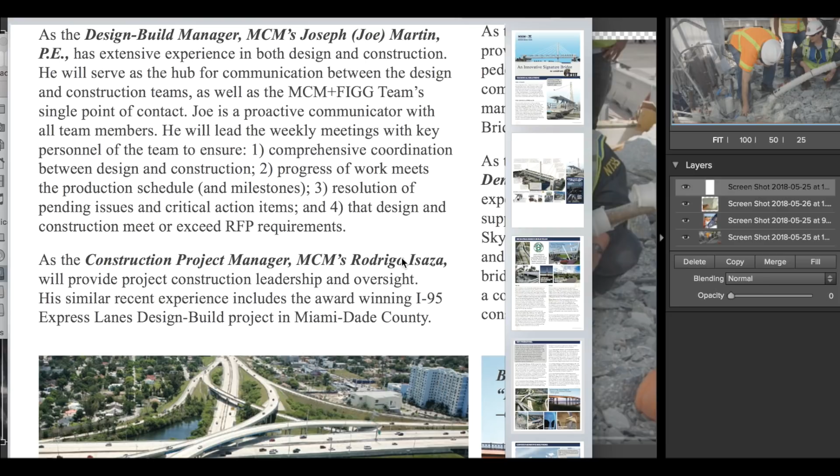"Over 40% of the team at MCM are FIU graduates, creating great pride in the opportunity to create an outstanding bridge for FIU and community." Apparently that's not so, huh? But this is what most of us are talking about, is that they're tied in with FIU. They can't trash them without trashing FIU. "As the construction project manager, MCM's Rodrigo Isaza will provide project construction leadership and oversight." This person's negligent. They didn't do a good enough job, in my opinion.